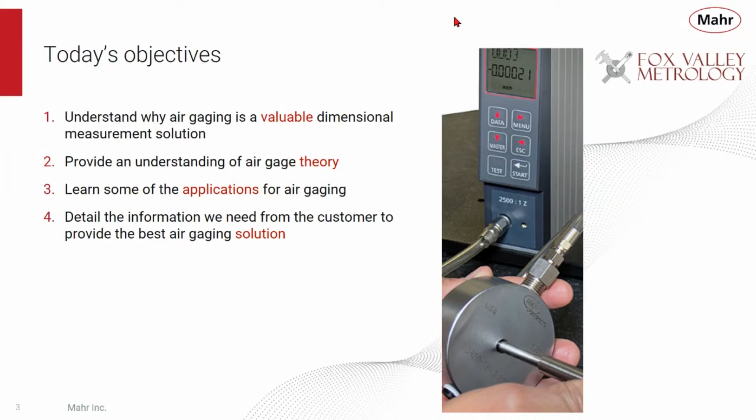So let's start diving into a little bit about air gauging.

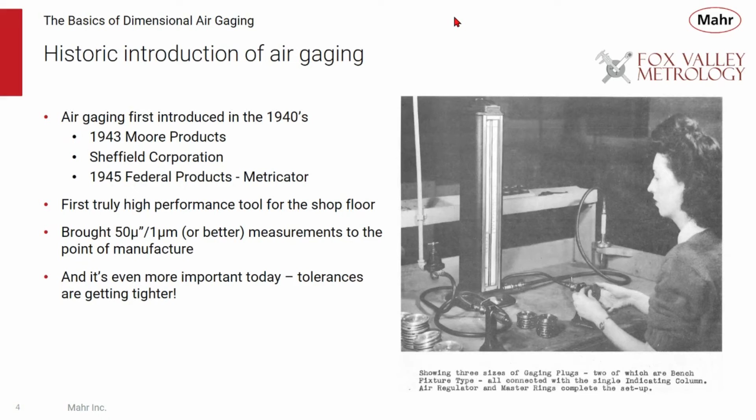It's always good to talk about history because air gauging has been around, and I've been around with Mahr, but not that long that I remember when air was first introduced, but pretty close. Air gauging was really introduced in the 40s. A company called Moore Products first introduced it, and Sheffield Corporation was part of that team at the time. In 1945, Federal Products, the original company here for Mahr, introduced the Metricator. This was really the first truly high performance tool for making precision measurements on the shop floor. It brought 50 microinches, or 1 micron or better measurements, to the point of manufacture. Just after wartime, we were starting to get into aviation and aerospace, and tolerances really started to get tight, so this was a way to bring air gauging to the point of manufacture.

It's always good to look at the first technical data that came out with the Federal Metricator in December of 1945. I highlighted a couple of important sentences, and you can see they're still relevant today. This marketing or training material talked about where air gauging fits into the scheme of things.

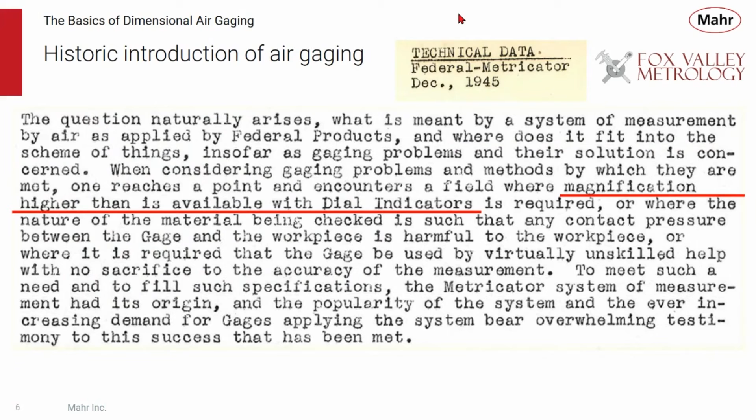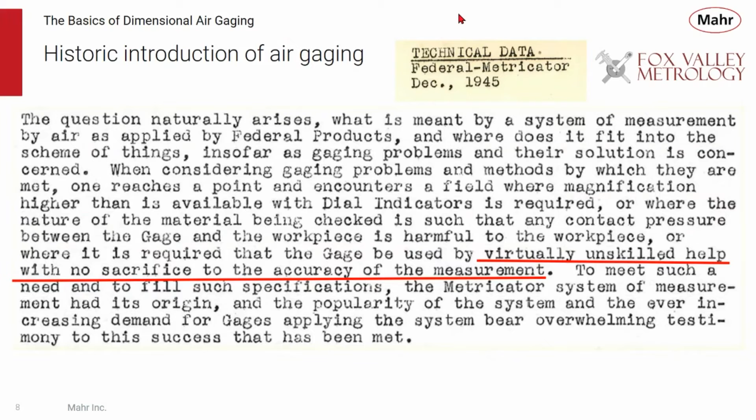It's important because it had magnification higher than what was, and still is, available with dial indicators. Air gauging uses basically a non-contact method, so you don't have to worry about contact points dragging on sensitive parts, which is a good feature of air gauging. Because air gauging is made to the dimension you want to manufacture, there's really no operator involvement needed. So virtually unskilled help can make very high quality measurements with air gauging. And all those things are still true today.

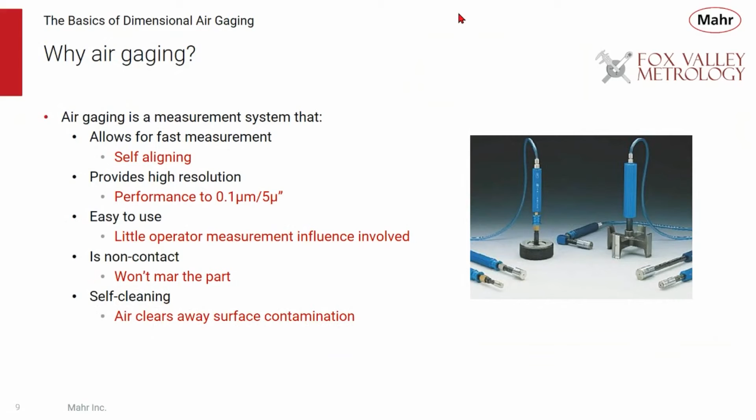Air gauging is a measurement system that allows for fast measurement. That's because it's made to the specific size. It's self-aligning - there's no rocking or searching for the high points. You put the plug into the hole and you get a great measurement, with performance better than 5 microinches or 0.1 micrometer. It's easy to use, with little operator skill involved or influence available. It's non-contact - there is no sensitive contact point touching the part, air pressure does that. Of course the body of the plug will touch the part, but in terms of dragging a contact point across a part, air gauging will not mar it. And because air is forced out through the air plug or air ring, it's always cleaning itself - it gets rid of water-based contamination, which is great for use right at the point of manufacture. So those are all great features.

So when do we use air gauging? We use it for tight tolerance conditions, when part dimensions are greater than 3 millimeters. Because it's a variable measurement system, it gives us the information needed to make decisions about how good or bad the part is, or start collecting data for process control. It's really good for high volume parts because we can make that measurement very quickly without operator influence - great for fast production type environments. It's also good for geometric measurements like tapers or straightness, because of the small jet size we can do those checks right at the point of manufacture. And because the point of manufacture is dirty, that's a great environment for air gauging since it can blow away surface contamination.

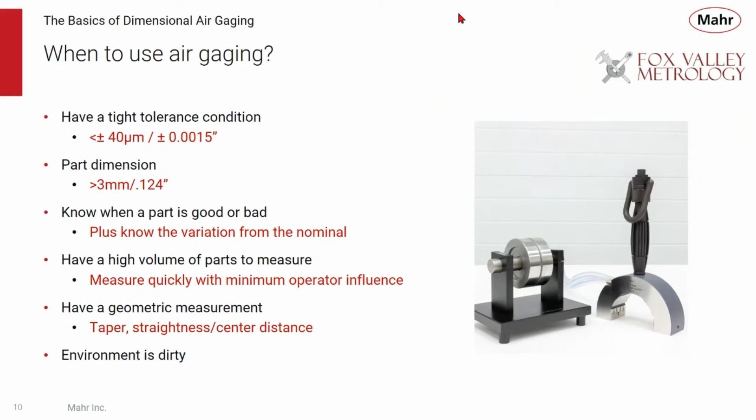Is air gauging difficult to apply? Well, not really. Air gauging is really no different than any other type of gauging solution, whether it be a snap gauge, an adjustable bore gauge, or even a caliper.

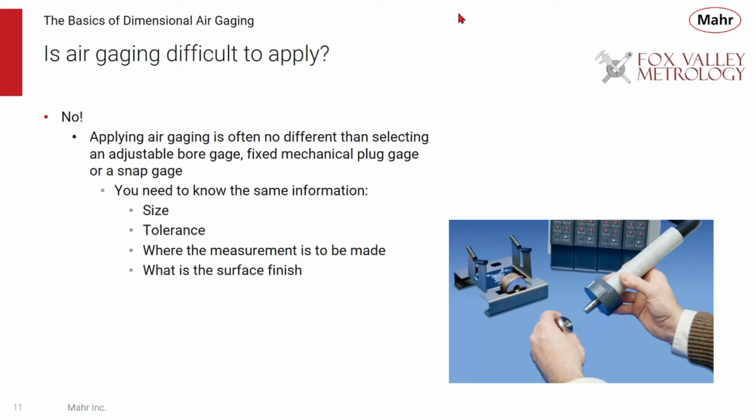What do you need to know? You need to know the size, you need to know what the tolerance is, you need to know where the measurement is being made. And as we see later on, surface finish can be important with air gauging. So we will ask, what is the surface finish of the part to be manufactured when we apply air gauging for that solution? But it's kind of important to know that if you make a mistake in specifying the size or the tolerance, since it's made to the size and tolerance that you want to manufacture to, it may be an unusable measuring system.

So we don't want to add any air plugs to that scrap pile that's out there. Let's get the information right, and air gauging is going to give you a great and dependable solution for your measurement.

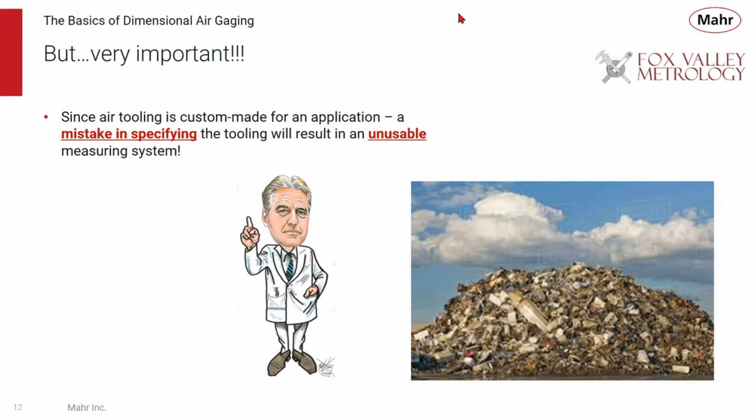Now, how does air gauging work? Well, it's kind of along the same principle as a garden hose. As you hold that hose against a wall, the distance there, it's going to build up pressure, and as you get closer and closer, eventually it shuts off. And what's happening? You're really restricting the water coming out of the hose.

Well, the same thing can be happening with air gauging. As you close off the water line, that pressure in the hose builds up. If you use air, the same thing happens. As you close off the air line, the pressure in the supply line builds up. And that's what's happening with air gauging.

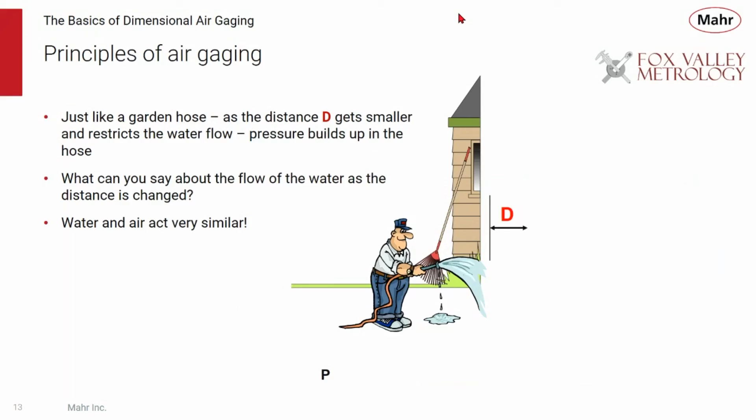So you could think about the distance and the pressure change. And really, you can start graphing out those things that are happening, whether it be the flow of water or air coming out of the hose, or the back pressure that's building up in the hose. They're very similar curves, they're opposite, but if we look at the pressure, when the hose is completely restricted, we're going to have the highest pressure, and when it's wide open, we're going to have the lowest pressure, and that becomes our pressure-distance curve.

And as you notice here, there's a nice straight area of that curve. So if you can control the pressure, the nozzle size, and the distance between the nozzle and the surface being measured, you can create a very linear, reproducible curve. Basically, you build the accuracy into the air gauging system.

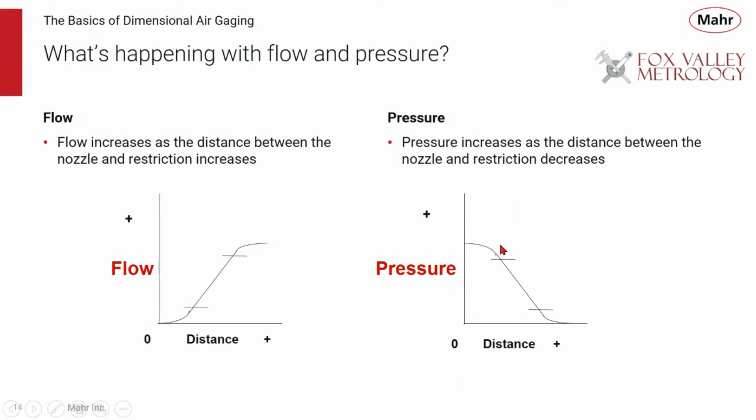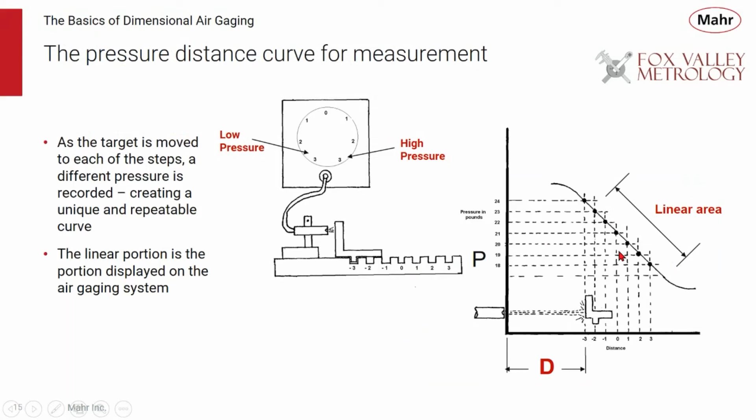And it all really comes down to that jet. The pressure-distance curve is dependent on that jet, as you can see in the air plug here, which the air flows through. All air tooling, whether it be rings or plugs, have these jets. So as the air jet is restricted, we are measuring what's happening to the air, the back pressure that's happening in the system. With a typical air tool, the air comes in and is split between two jets.

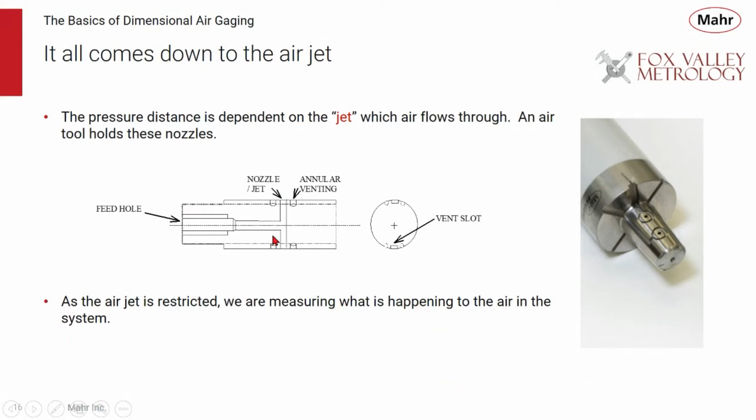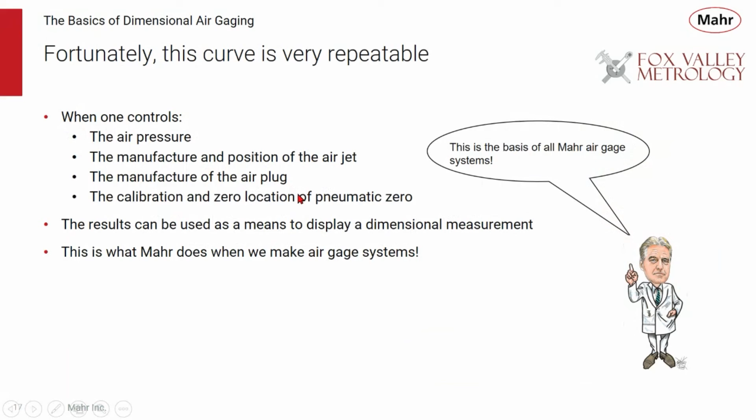It's a differential measuring system. You restrict the jets, you get a dimensional measurement. So when we can control the air pressure, the manufacture and position of the air jet, the manufacture of the air plug, and calibrate and control the zero location of a pneumatic zero, we can produce a very repeatable and very accurate measuring system. And this is what Mahr does. We build the accuracy into our air gauge systems.

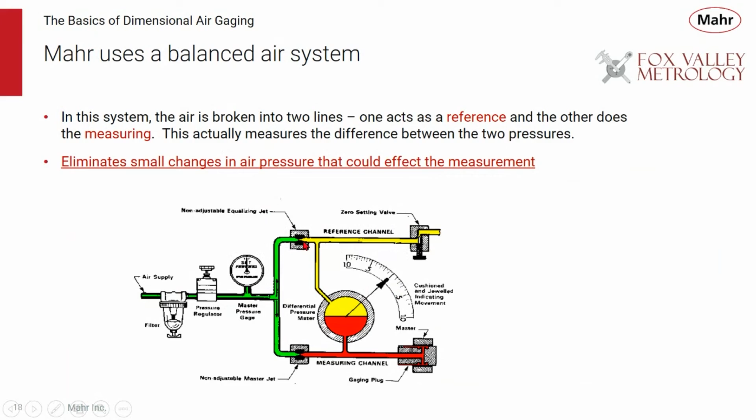And we also take the air tooling, we build the accuracy into that, but we also build the accuracy into our air display systems, as all our air displays are wrapped around a single, balanced air gauge system. This kind of represents the system we're using, where the air comes in but is split between two channels, a measuring channel and a reference channel. We compare the difference between those two to get our reading. The benefit of this is that if there's any slight pressure change, atmospheric pressure, or pressure on the supply line that the regulator can't take care of, both channels are affected equally, and we'll still get the same great results. So accuracy in the tooling and accuracy in the display system.

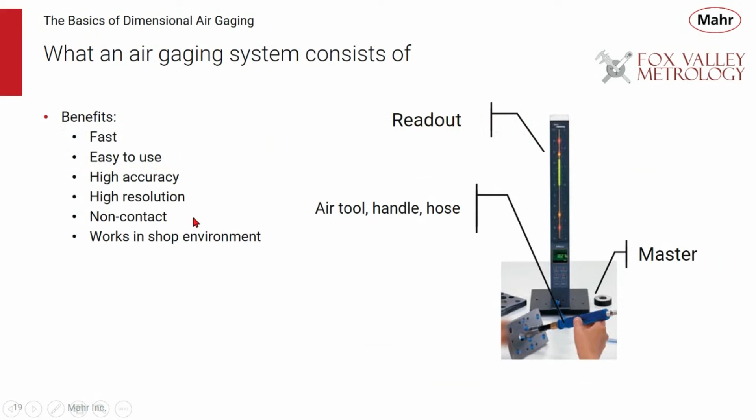An air gauge system consists of that readout we talked about with the balanced system for air gauging. We have the tooling, the handle, and the hose. Because air gauging is a comparative gauging system, you have to have the master. The benefits are fast, ease of use, high accuracy, high resolution, non-contact, and it works in the shop environment. Now, when you select an air gauge system, there's lots of things to think about.

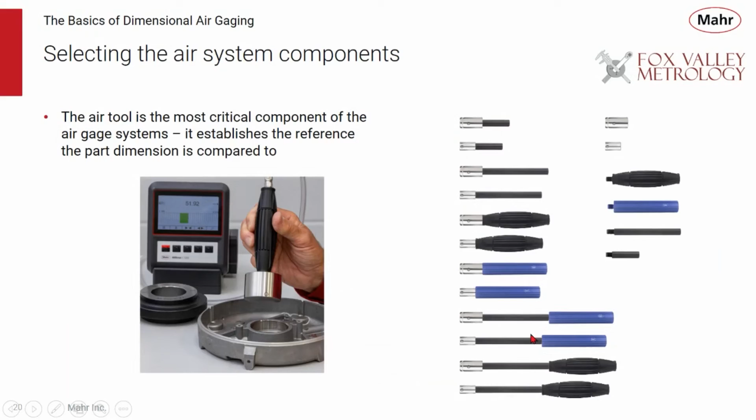The air tooling is the most critical part of the air gauge system, as it establishes the reference to the part dimension that it's being compared to. So the air system is the display, the tooling, the master, and the part. We can supply air tooling in lots of different combinations, handles, extensions, etc.

But the air plug is the most critical part. It's a hardened steel cylinder with the air passages coming through, with opposed jets. The air passes into the plug and out the jets. At the proximity of the jet, as it's being throttled by the surface, it restricts the flow, builds up the back pressure, and the air gauge instrument reads that back pressure to give you the dimension.

So here's our standard air tooling. This is a through hole design where the air jet is back from the front of the plug, which allows us to pass through a hole all the way to the bottom. Or if we have a blind hole, we can work with blind hole plugs that move that jet very close to the bottom of the bore you're trying to measure.

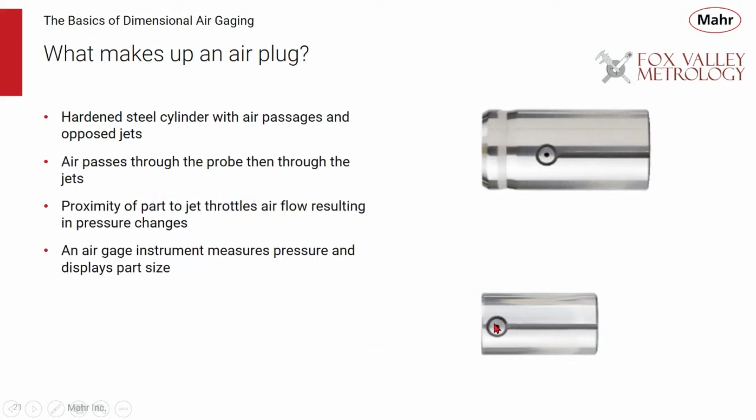Now we talked about surface finish being important with air gauging. Air gauging works with back pressure. As the air comes in, it goes through the jets to the surface being measured. Because it's being restricted, we have to have a good surface for the restriction to begin.

If that surface has a rough profile, the air has to fill those valleys within the surface. And if those valleys are too deep, you can get a little bit of offset bias based on that roughness. You can think of a contact measuring system as only measuring the peaks of that surface, so if the surface is very rough, you can get an offset between a contact system and an air gauging system.

That's why we want to know and ask about the surface roughness, because if you're measuring a tight tolerance, you need to know and understand the surface finish of the part, as it can affect the end results.

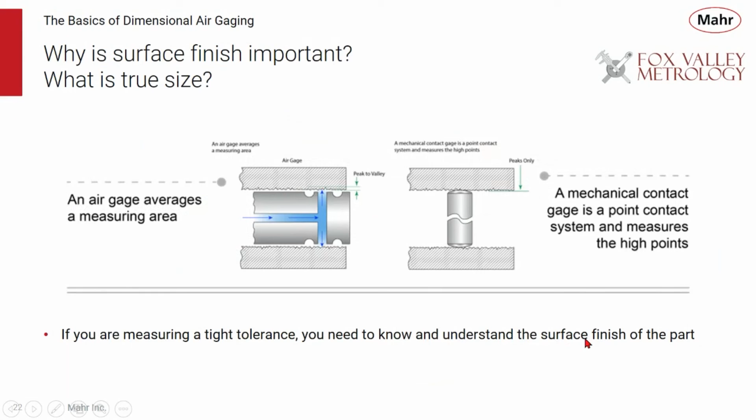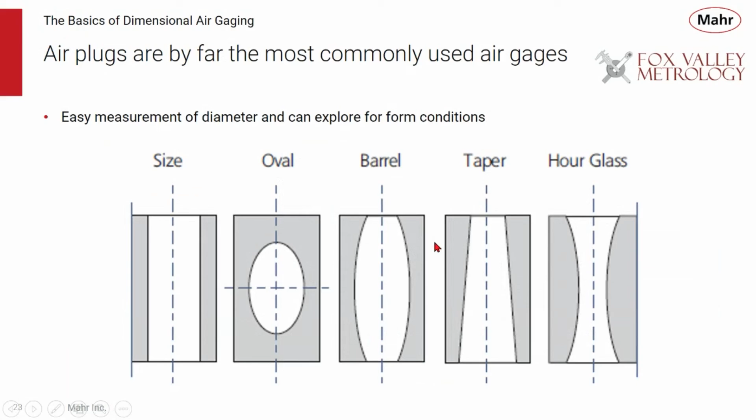Air gauging, because it's a two-point measuring system, lets you explore a bore for size, rotate a plug for ovality, and check the bore length for barrel, taper, or hourglass shape simply by exploring the bore and looking at the results.

There are different body styles for through or blind hole. You can have relieved or non-relieved designs, meaning the body length can be extended so the whole body length can go into a part. That's especially helpful with interrupted surfaces, making for easy insertion. You can add stop collars to get a specific depth on a short land.

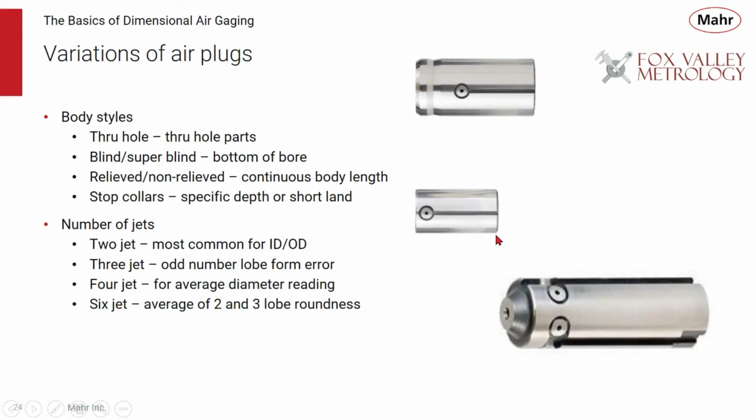Plus, you can add numerous points of measurement with numerous jets. Two jets is most common for ID and OD, but if you have a lobing condition in your part, you may want a three-jet application. We can do four jets for averaging, and six jets, which average a two and three lobe condition. So there are lots of different combinations of jetting for air tooling.

You can also measure ODs with air rings. If you have an outside dimension, various sizes with 2 or 3 point jet combinations, they can be portable or bench mounted. Also, if you want to measure an OD in the machine, we have air snap gauges with single or multi-jet configurations, used in the machine at the point of manufacture.

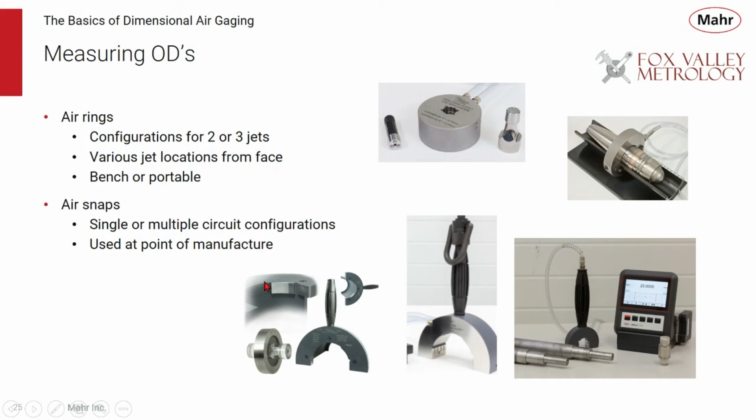But the greatest thing about air gauging is the actual jet itself. The jets or sensors are very small and can be positioned very close together. There's probably no other sensor that can do this at the same cost as an air plug. You can get them as close as 100 thousandths of an inch, but we can do things to get them even closer if needed, providing the capability of doing multi-dimensional geometric checks in a single tool.

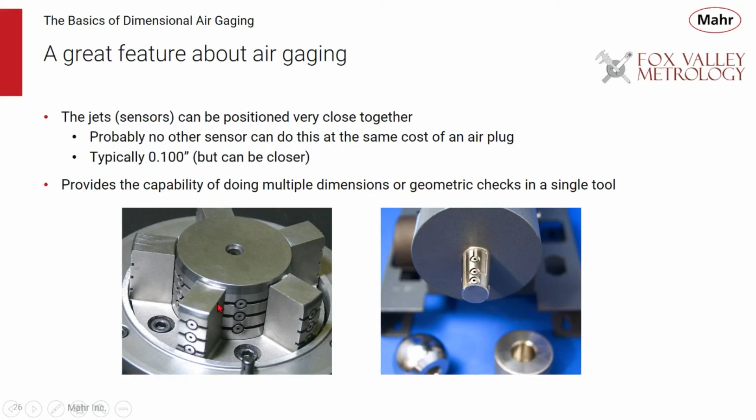Tapers are a great application for air gauging because you can build multiple jets into a small location, or you can use it for machine tool tapers. If you can measure two diameters at a known distance, you can display the actual angle all on one system. Again, no other type of measuring system can do so much in such a small location.

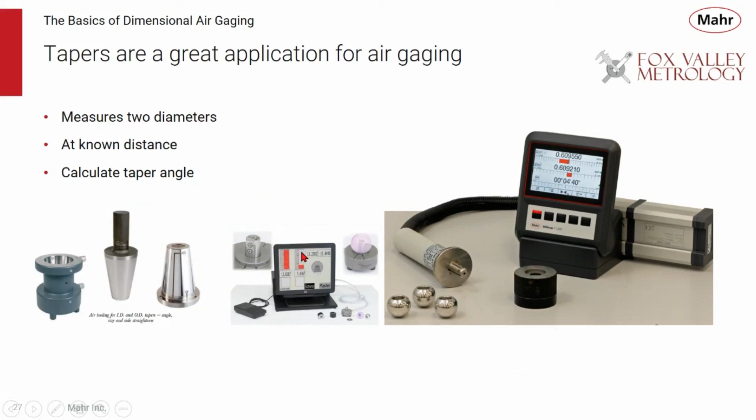Mahr offers numerous display options out there, whether it be our new C1202 bench amplifier, our portable µDimensionair, or column gauges that some customers like to use to see multiple channels next to each other, making a large display for viewing from far away. We have our N1700 PC with cockpit to provide an economical PC-based system, or we can go through full gauging computer applications, storing multiple parts, storing lots of dimensions, and numerous customizable gauging applications.

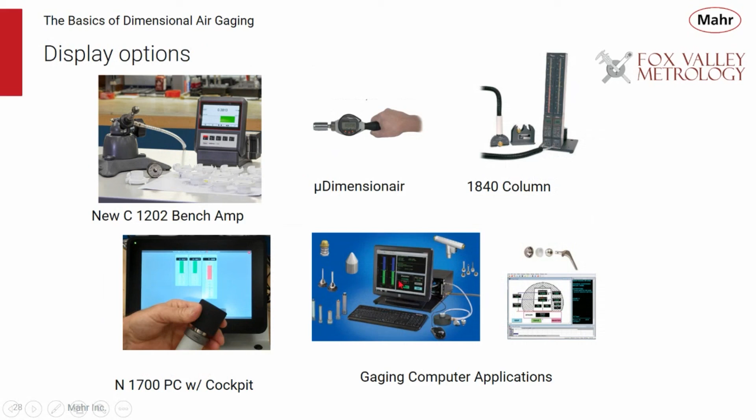We're also going to ask about the typical things when we apply tooling: what's the size, what's the tolerance, what's the location, surface finish, form considerations, type of display that you want, are masters required. We can provide worksheets, or we can just come and sit with you. Fox Valley can sit with you to help you decide on the best tooling for your application.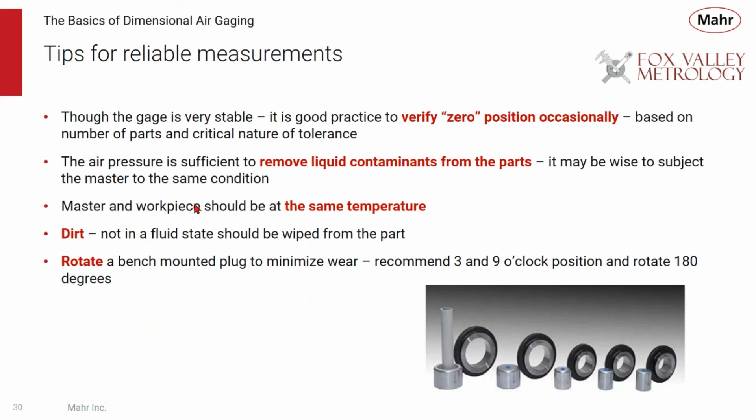So why Mahr for your air gauging needs? Well, we have experience. We've done hundreds of thousands of gauging applications for air, coming up with very unique and very successful solutions, whether it be using small slit jets, multiple jets, or floating air tooling to get into parts which don't have concentric holes into them. I think we have the application know-how to provide some very great and successful application solutions.

As I mentioned, Mahr builds the application and accuracy into the system. We make all the air tooling to a standard. The displays are made to a standard, which means you can interchange them and maintain system accuracy as we publish. And we know accuracy since we not only make the gauging but also make and measure the masters. We make our own rings and plugs and so forth, and we have the tooling. We make our precision Precimar line to measure those masters to ensure they meet the specifications.